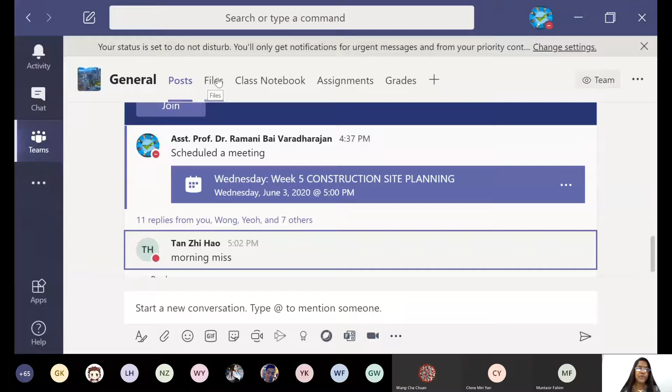Okay, can you see all the threads, and there are some assignment grades? Can you see that? Yes. Under that, you can see files, isn't it? See here, files. Click these files under your team, construction technology class team, files, class material. Under this I posted all the class materials. Last time I also posted the amended course outline because we changed the marking, right? I posted the amended course outline and all the classes. Every week's classes I posted here until last week.

All right, you have to follow the weekly slides, and please have a read through first of all. Right, any question from the last class? Any question? No question.

Okay, let's start the class. Start recording. Teacher, I can find the slides in the file section. Today's slide, for the slides you have uploaded in the files section, how can I find it? I didn't get it. Okay, just email me, I will attach it to you. I have it, okay, thank you. Just now I showed you, right? Yeah I saw it now, but when I tried to get it I couldn't. Okay.

Maybe you joined lately, that's why you didn't get the slides. Can you all see the PowerPoint slides today? Week 5, Wednesday class, this one.

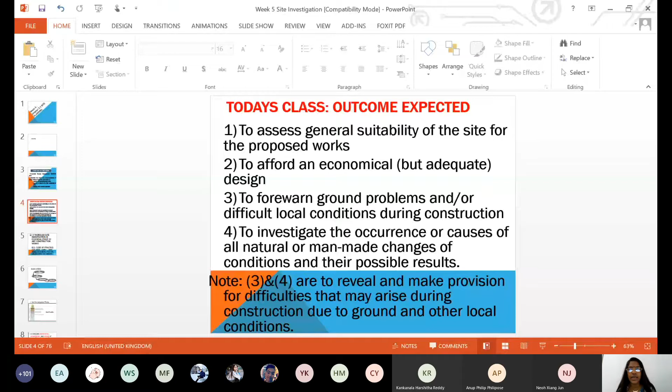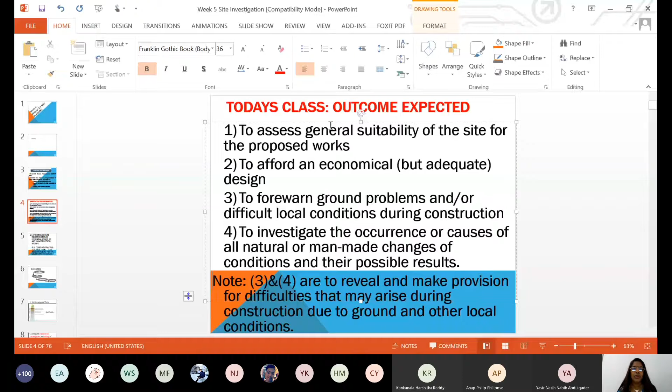When you go to the site, you are given a barren land. Your planning starts. Site planning starts, right? When I say site planning, what comes to your mind? What are you supposed to do when it is site planning? The foundation. Very good. So you must look for the foundation, because the construction work is going to start with the foundation. In the planning, you should include all information about the foundation: what is the type of foundation, what is the depth, etc.

Okay, any other answer? We will correct later. I'm going to give you the information anyway, and based on that we can correct. I just want to know how much you know before I give you the class. Any other information? Cut and fill, excavation. He's saying excavation. Excavation is coming to his mind when I talk about site planning. Yeah, you are moving slowly into the topic. Any other?

Okay. So once you learn this topic, what are the outcomes? We are at CLO2, the course learning outcome which has building elements. Under CLO2, you'll be learning about all the building elements, and one of the elements is the site. First, to assess general suitability of the site for the proposed work. You must check the feasibility of the site. Proposed work may be a residential building, school building, medical center, water treatment plant, or a processing plant, anything.

Second one, to afford an economical but adequate design, right? Once you... Yes, please. What happened? Any question? Can you hear me?

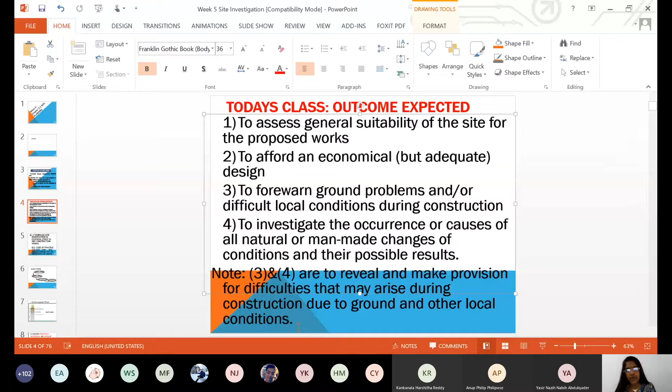Next. All these regulations and standards are available in BS. Globally we are following British standards. Later, European codes came out, and now we are using them together. Some companies purely use British code, some use Euro code, some mix. Some still use BS codes for concrete grades and the specification of the cubes and molds. Whether you are in Sudan, Saudi Arabia, Malaysia, China or India, we are still borrowing from British standards.

The number is CP 2001:1957, Site Investigation. You can search Google to read more. It puts its objectives as above; I borrowed all these objectives from the standard. Once you know site planning, you will know all the activities under it, especially knowing the characteristics and features of surface and subsurface conditions of the site given to you for construction.

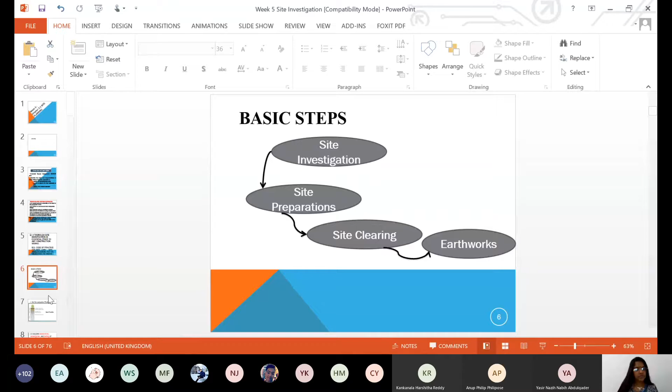Okay, come on, answer me. When you do the excavation, say for example, take the soil sample as it is. When you do the excavation, what's the purpose of doing excavation? Anybody? Hello, are you there? To do the foundation. Foundation, yes. Footings, maybe piles or shallow or raft, or just the brickwork or a concrete work, right? You need to put the foundation for your structure, right?

Oh, I'm just testing your common sense. Nowadays, because of more use of computer media, we lost using our common sense. Sometimes you must trigger that.

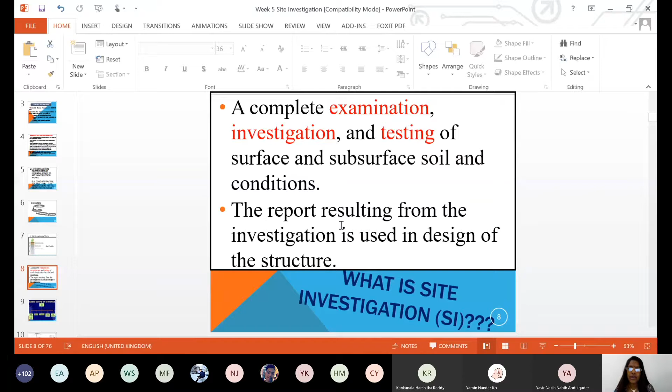Geotechnical. Very good. Maybe they are all year 4 students. Geotechnical or foundation engineer, soil engineer, soil scientist. Soil scientists can help to do this. So all the geotechnical information and geotechnical parameters have to be determined first. The job of geotechnical engineer comes in at the site, right? Before this, we saw what the civil engineer is doing at the office, what the design engineer is doing, what the safety officer is doing. When you come to site, the geotechnical engineer starts the job of soil testing.

Okay, basic scope of site investigation work. See here, there is a list of things that has to be covered under site investigation. Desk studies and site investigation, site visit. Okay, some groundwork, some forms, some rules and regulations, approval. Even for drilling, you need to get approval.

So approvals, all this desk work has to be done, and then visit the site, boring, start sampling. Once you sample, you can do the testing, and sometimes it may be sent to the lab or sometimes done in situ. Sometimes you need to wait, giving it to the department, getting the response, the results from the department. So these are the... What do you mean by boring?

Boring is drilling a hole. Oh, okay. For piling especially. Okay. Even for testing we use this. I will explain more later. So these are the things that will be coming under site investigation. I repeat, under site investigation, the tasks are desk studies, groundwork, or documentation work, and site visit, boring, sampling, field testing, and lab testing.

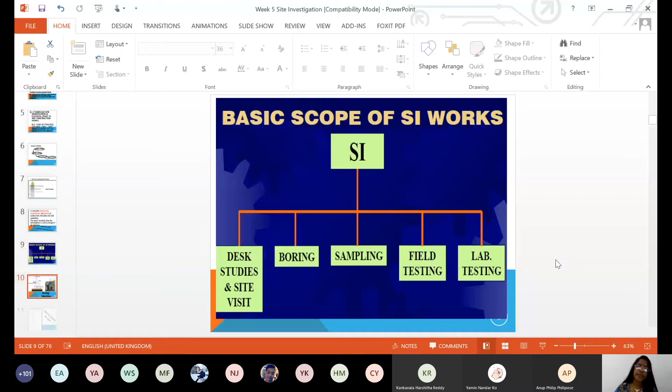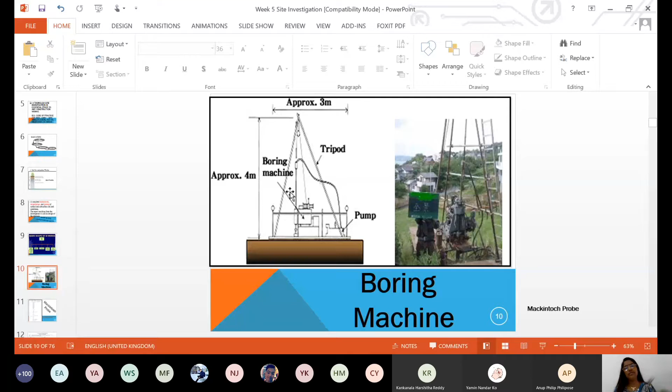Boring machine. You can see the picture here, boring machine. It has a tripod, the stand. Most of you have covered surveying, right? Surveying already done, right? No. Yes. Maybe around 30% of students have completed the surveying module. In that, you stand the equipment on a tripod, isn't it? What is the purpose of the tripod? Here, tripod. What's the purpose?

For maintaining level. I mean, making it stand exactly. Support, right? Support and maintain level. Support the equipment, firm the equipment to the ground. Otherwise, it will be shaking. If it is shaking, you cannot make the measurement, right? So for supporting the equipment and maintaining the level, as you said. Good. Then see here the equipment, the bore. Boring machine is here. It will drill the hole. It may be for sampling. It may be for piling.

Okay, next equipment. This one is for big projects, for piling, for foundation purpose. Second one, this one. This is most important. You should all know it for testing purpose, for examining the soil, investigation of the soil. Mackintosh Probe. This one you will be using in your laboratory. Has anyone used the Mackintosh Probe before, in your project, capstone? Yes. Mackintosh Probe in the geotechnical engineering lab, soil lab. A few year 4 students might have used it in their laboratory class under a geotechnical or soil related paper.

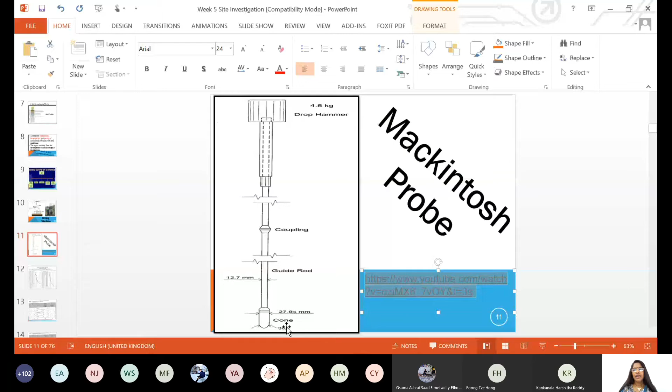So what do you see from the video? How to use this Mackintosh Probe, right? The purpose of this Mackintosh Probe is to test the soil beneath the ground. It's simply called a penetrometer, or penetration. The test is called penetration test to know about the soils that are below. You can also take a soil sample from this to test for other geotechnical properties like soil density, soil moisture, bearing strength, bearing capacity, and so on. Even the classification of soil also you can take, but depending on the amount of sample you're collecting. So many purposes are served by this Mackintosh Probe. Every company, builders should have one, even the universities, they should have a proper Mackintosh Probe.

Nowadays they are dynamic. You don't need to blow. They are automatic, motor-driven blowings are there. Dynamic Mackintosh are there, you can use it. Depending on the company, they will have manual or this type of Mackintosh Probe. You should know how to use it and what are the advantages of using it.

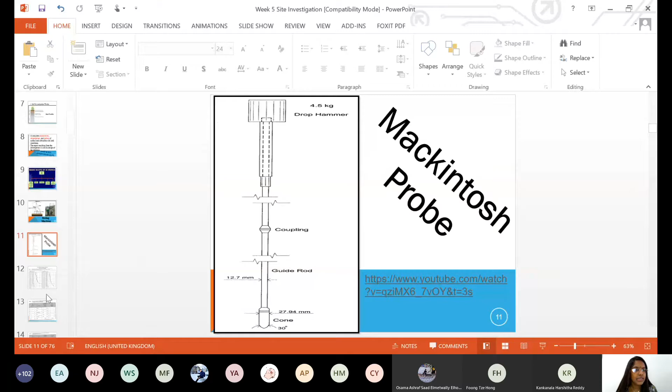Mainly to know geotechnical properties for sampling, for understanding the characteristics of the soil beneath the ground, and also for geotechnical properties. You see here the record. Just now they were talking in the video, so they take the video, I mean they have the observation like this. For every 40 blows, they reach until 0.3 meter. The rod has been driven until 0.3 meter. Another 32, they're driven up to 0.6. Another 12, they're driven up to 0.9. So it keeps on being driven into the ground to know how the soil strata is below.

According to the video, they said it can reach up to 400 blows or 15 meters, right? You have to reach the distance of... 15 meters, not here, huh? Not reached at all, but this is different data. So you have to reach a maximum of 15 meters or 400 blows, right? If you reach 400 blows in a shorter interval, shorter depth, then the soil strata is very good. You reach a hard strata very quickly, or within a short depth, meaning you are saving money for your foundation. You don't have to go deeper. Just there, for example, within 1 meter you reach hard rock.

Maybe you're building a house on a hill station. Then you reach within 1 meter very hard rock, then you can save, and you can have not only this type — we do not know the type of soil below, right? It's not necessarily a hilly station or hilly area. Even any terrain which has a hard strata will be found by using this type of penetrometer. At what depth you can reach the hard surface, so that you can stop your foundation there. You can decide your depth of foundation, you can decide your economy, your money spent for your foundation.

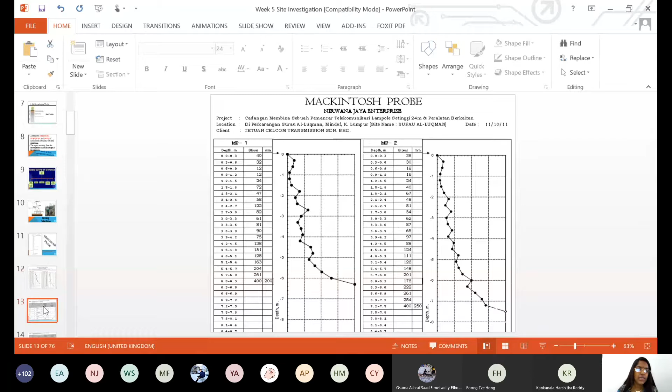You can check, right? Not only the foundation, also properties of the soil. Properties of the soil are important. Not only the properties of soil, but contamination — you will know the character, the properties of the soil, whether it's a contaminated soil, the quality of the soil. I mean to say, quality of the soil also you can determine by using these samplers. See, you will know more in a geotechnical paper if you conduct the test using this, or you go for a capstone project, you really have to conduct this to design your building. That time you'll know, you will have a chance to use it.

Hello? It's a blow, right? Sorry, over 30 blows. Sorry, 10 meters. Okay, it's a blow per feet. It's a blow only, no meter.

You can take disturbed soil or undisturbed soil. There are different types of tests you need to conduct to know the strength, compressive strength, flexural strength, for variable purposes. Maybe for the design engineer, you will be feeding the data, or for the environmental engineer, and so on.

You can use this for sampling, for comparison, and JKR Malaysia record - JKR, Jabatan Kerja Raya - or Mackintosh Probe. JKR has actually designed their own customized Mackintosh Probe for their testing, which is a better one. I have posted another video showing JKR's Mackintosh Probe, which you can watch later. It will be interesting for you. Let's look at this next property, and some of the other properties you can see here.

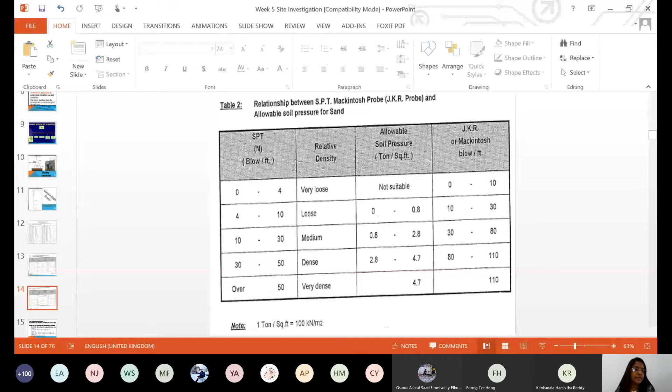Soil investigation continued. So we are still on the first topic, soil investigation. Maybe this topic has 4 subheadings: number 1 is soil investigation, then site clearance, and then foundation design, and so on. Okay, I will go through them one by one. We are still on the first topic, soil investigation.

Subsoil investigation shall be carried out very early, right? By this test, using Mackintosh Probe, you can know what is the strata below the ground, what is the nature of the ground given, and decide what type of structure it could be - whether you can go for a high-rise building, a bungalow, or just a terrace house, and so on.

This stage is for the purpose of designing a building, and it's planned in 3 phases. This site investigation can be in 3 phases: phase 1, phase 2, phase 3 - collection of available information, preliminary reconnaissance or site visit (we can call this a preliminary site visit), and detailed soil exploration. So under site planning or site investigation, you will be doing these 3 tasks.

Collection of information means the soil information, soil sampling. Site visit: you must see whether the site is occupied by somebody, what is the land use before you occupy the ground. Is it forestry? Is it agricultural land? Is it barren land? Is it used for disposal, and so on? Detailed soil exploration will cover the porosity of the soil, soil moisture content, soil classification, and the properties of soil, and so on.

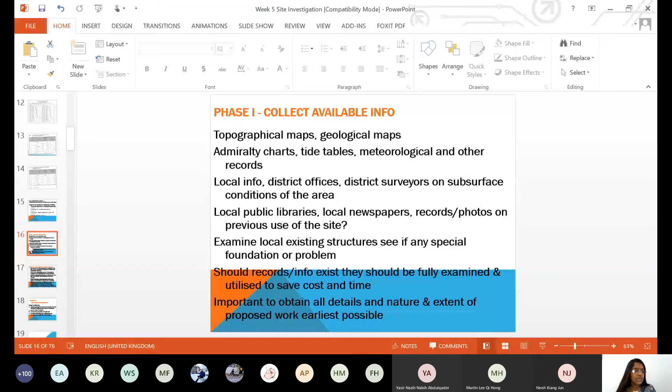Okay, Phase 3, detailed exploration. The scope is to determine the scope of site exploration further, for detailed geological structure of the site, thickness, sequence, and extent of strata. The earlier phase, Phase 1, was mostly maps related and background or previous information, all paperwork. This phase goes into the site, which is soil strata.

The second one is topography survey if necessary, reconnaissance survey - these are all about the photographs and the maps.

Phase 3 is for the real structure, real soils, structure at the site, underground site. For this you need to know the thickness, sequence, extent of the strata - strata means layer - groundwater conditions, mechanical properties of the in-situ soil, mainly the bearing capacity of the soil, strength of the soil, whether it's loose soil, hard strata, full hard strata, half clay and half rock, or sandy, silty, to obtain disturbed and undisturbed soil samples for identification and lab testing.

As I said before, for some purposes you may be using disturbed soil. What is disturbed soil? What is undisturbed soil? There are molds and equipment available for taking samples like this.

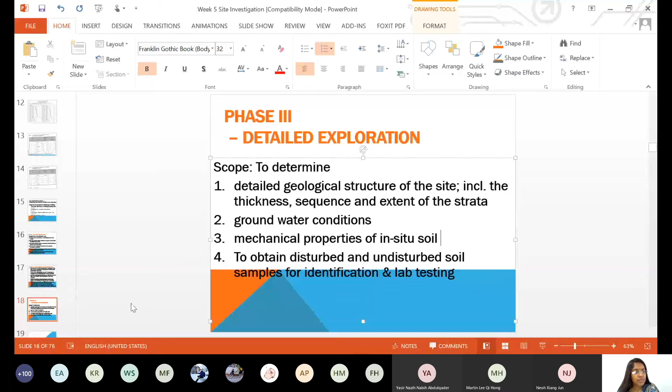In some situations you need to use disturbed soil - for knowing the strength of the soil, you really have to compact it properly, preparing the soil sample before testing. In that case you can take disturbed soil. But for undisturbed soil, if you want to know the strata, the soil layer of the ground, you have to take undisturbed soil, so that you know the layers at different depths. Depending on the purpose, you will go for different types of sampling.

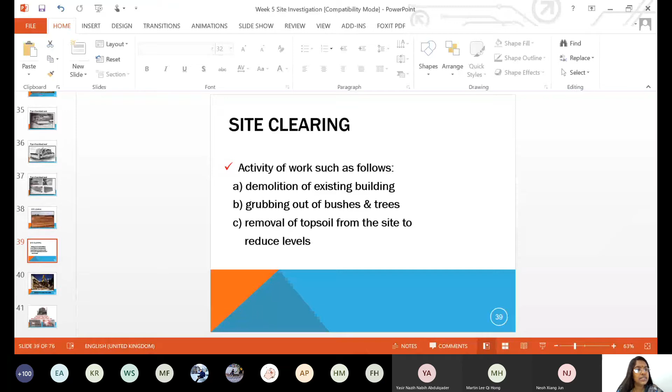Okay, where are we here - site clearance, site preparation. So far we did site planning, right? The preliminary things, paperwork, test work, and documentation work has to be done.

Second is site preparation. How are you going to prepare the site? The site is given, preliminary tests are done, investigations are done. We are going into the site to clear it. Before clearing, you prepare the site and put proper fencing. Let's see what the things are.

Site preparation. What is site preparation? It is all activities that have been done before actual construction work is carried out.

I'll rewrite the sentence later. But here, site preparation means you should know who were the dwellers before, whether it was a forest or a water body. Sometimes they close the water body to construct their building. Sometimes it may be a cave, sometimes a hill or mine. So you need to know the type of usage before.

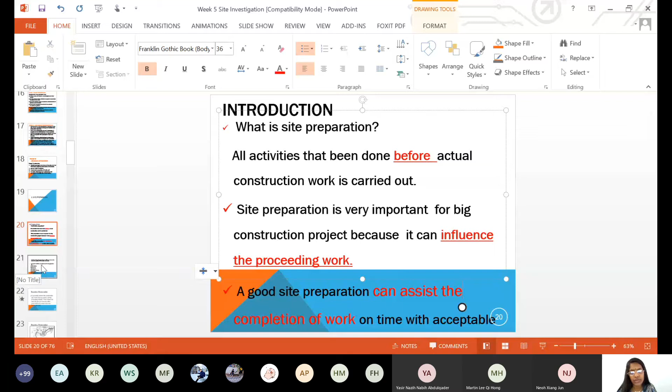You should avoid all these things. Prepare the site before you start the work. A good site preparation can assist the completion of the work on time with acceptable quality, because you don't spend time at each and every stage to clear or prepare the site. Prepare the site first, so that further work will be very smooth and on time.

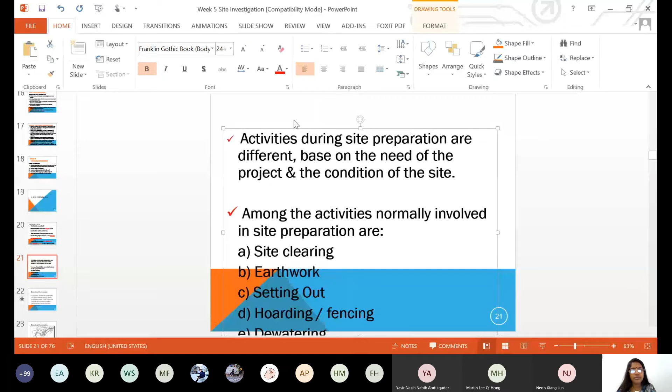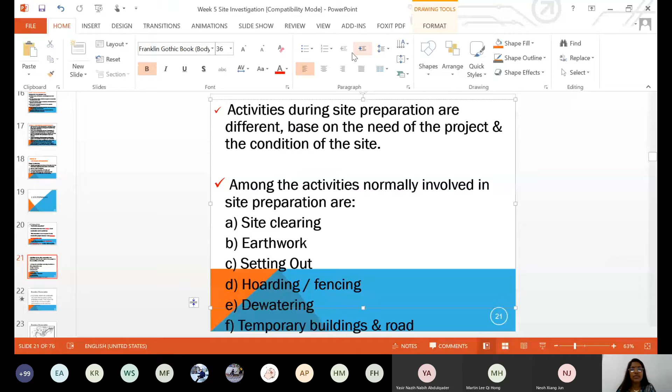Activities. Let me make the slide bigger. What are the activities you can do for the preparation? During site preparation, these are different based on the need of the project and the conditions of the site. So based on the need, you can prepare the site. Among the activities normally involved are site clearing, earthworks, setting out, hoarding or fencing, dewatering, and temporary buildings and roads. That's all, these are the main things, just as I was saying.

For preparing your site, you may be clearing, doing some earthwork, leveling it, or setting out the curves and the undulations. The setting out of curves itself is one of the survey problems you'll be doing in your survey module. You should know this.

Mainly for transportation, planning your roadway and your in-and-out communication through vehicles, especially for loading and unloading materials during construction. In future, for the dwellers, you should provide proper alignment of the road, and for that, the setting out of curves will be useful in future. So this job is done during preparation of the work.

Fencing and dewatering: fencing means providing the proper netting arrangement to mark the border of the site. Dewatering means if there is any water, a pond or a spring or any small water body available, you need to fill it up or dewater it. Temporary buildings and roads may include small building blocks. If it is a government building, like housing for electrical works or a water tank, you cannot remove it, you have to avoid it. But other buildings, like cemeteries, dumped materials, or demolished parts of houses, have to be removed before you start the work.

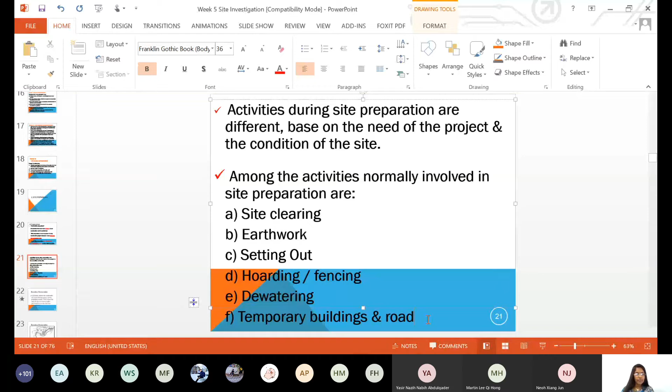Boundary demarcation: now we are starting the border line. You can use lime powder, or proper sketching equipment, to mark the site. There are nice videos if you watch about this boundary demarcation, showing how it's done to start the excavation. After preparing your site, you should do demarcation.

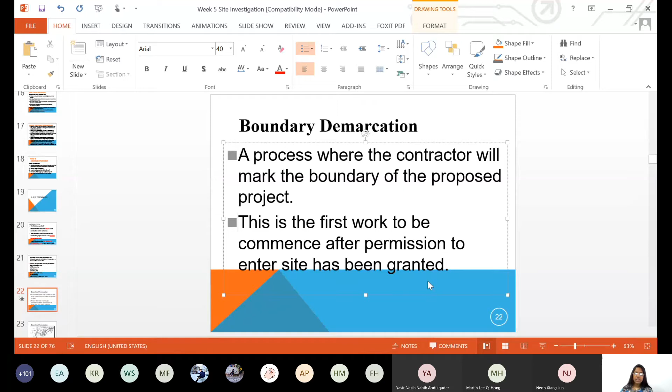Where the contractor will mark the boundary of the proposed project. This is the first work to be done after permission to enter the site has been granted. So boundary demarcation is important so that everyone is well informed, to avoid any activities like using the place or space for storing materials, wasting materials, or misusing others' boundary. Boundary demarcation is something like this, where I put a big one.

You can follow the exact layout which was prepared before and mark the boundary by constructing a fencing or by proper painting arrangement.

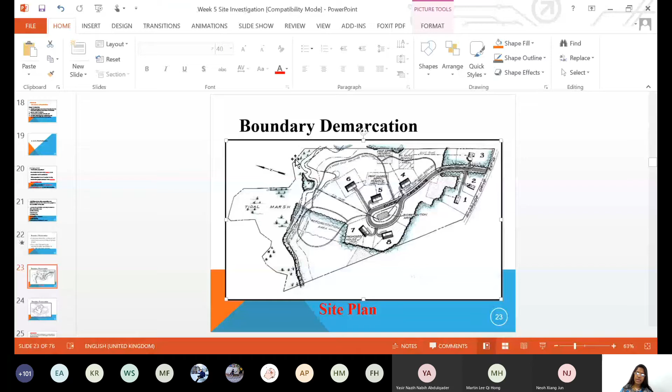Painting, or proper marking, to divide or provide the proper layout for your building. Then boundary demarcation - for example, you can see here the thickened line on the map.

Look, it is not just paperwork. It has to be available - the same thing should be available at the site. The aerial map or aerial photograph should look like this after demarcation.

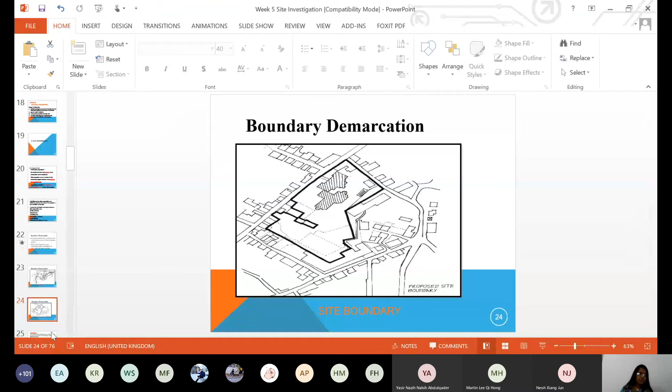Next one, site boundary. The surveyor must determine the site boundary.

Of the construction area, to avoid trespasses to the other construction area. So the purpose of the boundaries - everybody, both the workers at the site and also the people passing by, should know.

This is meant for construction. You should not enter - there is a hazard inside.

In many places, they provide proper boundary fencing or tapes. They put a tape, or even panels, steel panels.

Some sheets are marked and fixed at the boundary to divide the construction area from the common public areas.

Okay, site clearing. The third one is site clearing.

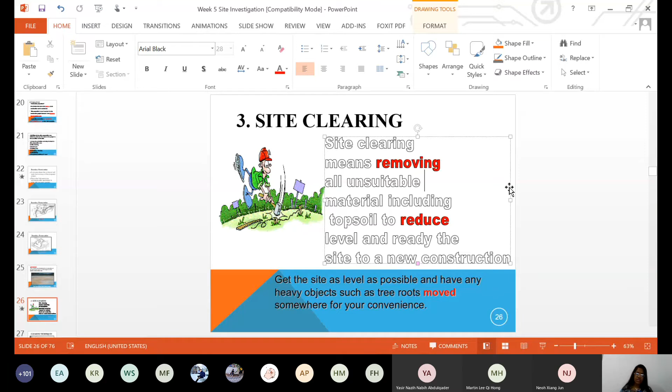Unless you are going to design or construct a drainage system, if you start with the building work, you should level it. Normally, if you level it, the build will be very easy. Sometimes they follow the curvature - that is risky, or more expensive.

If money is not a matter but time is a matter, you can avoid the time duration for clearing or leveling the site and go for construction following the curvature of the site given.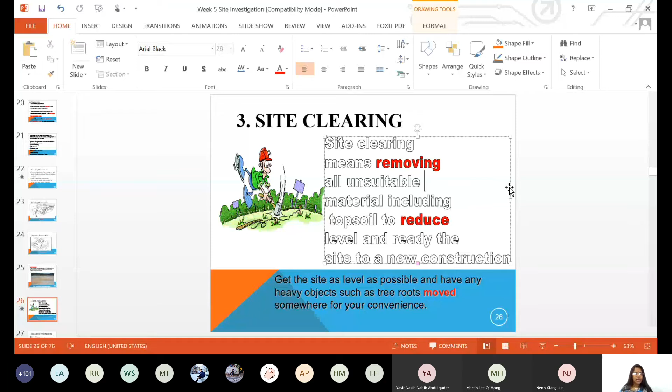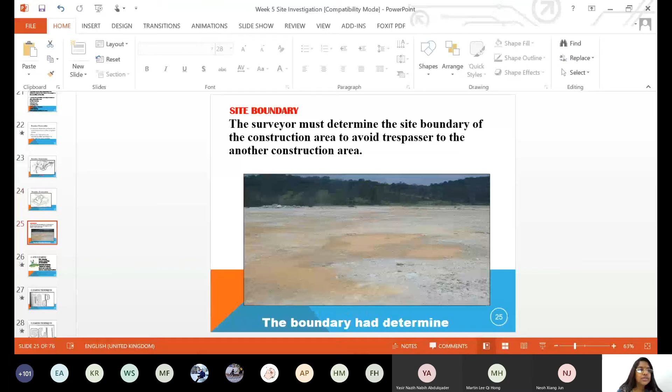Okay, before I go into the theory, let me show this one. When you talk about site, what are we doing? The title is site clearance. One moment - for site clearance, I will show a video.

What is this equipment called? I already wrote it there - for site clearance, you can also use backhoe excavators. This excavator is used for excavation, also leveling, also removing unwanted materials from the site.

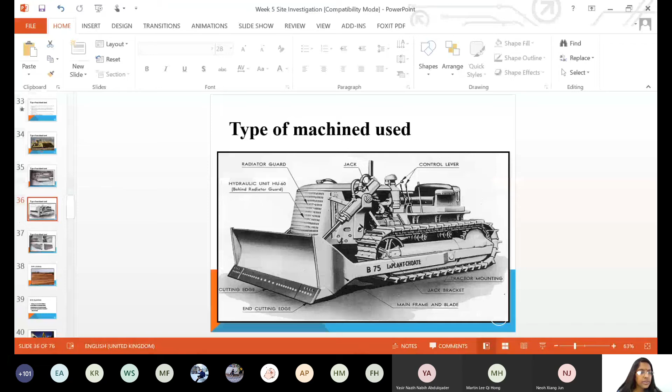Let's see one interesting video on this, how these excavators are working. There are different things here, but to avoid too much talking, I'll introduce this video here.

Where is it? Let's put it somewhere here. See - let's watch this video for a while. Is it?

All our theory you can just go through and read, but this video will be helpful to match your theory.

One moment, I share the slide. One moment, are you there? Are you all there? Yes, yes, okay thank you. No, not this one, wrongly shared. Wait, one minute, one minute. Where's this, stop sharing. Share my video, where's it?

I can't open the video. It's here, okay. Please watch this video - very interesting one to know.

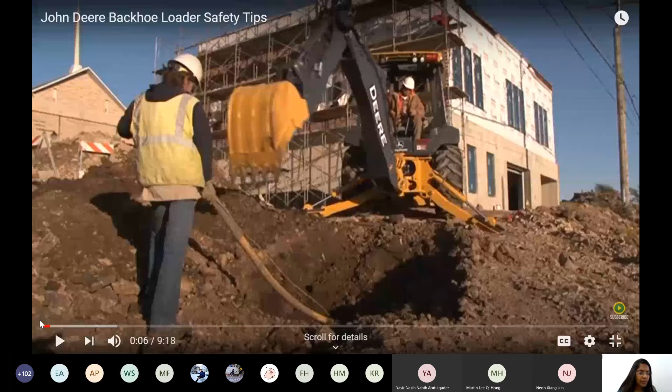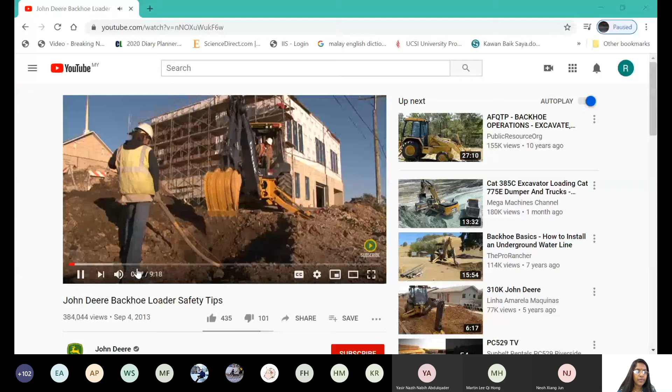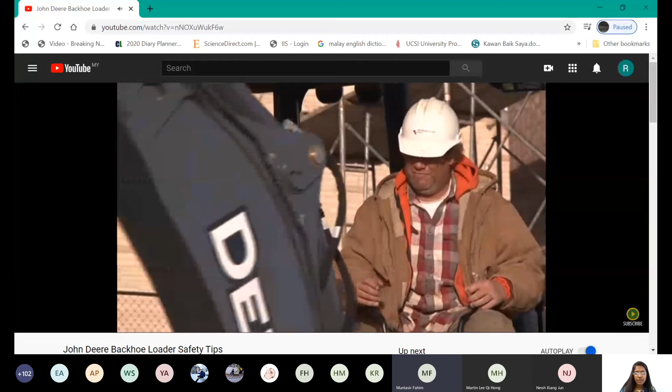Can you hear? Can you all hear? No, no, the video - we can't hear that. We can hear you. Wait, I'll change the video, there's a louder one actually.

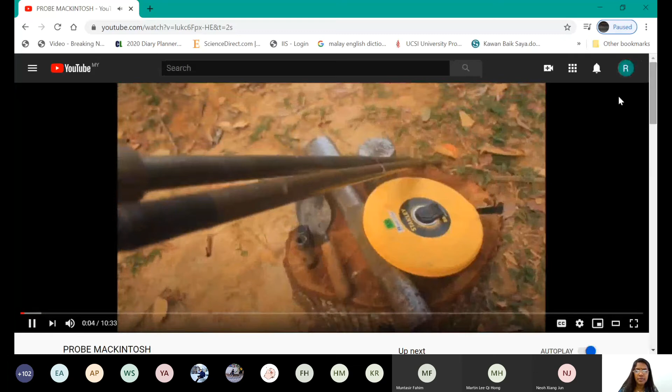No, not this one. Where, unavailable? I played it before - no, unavailable. Can you see the video? Can you see the video? No. Yes.

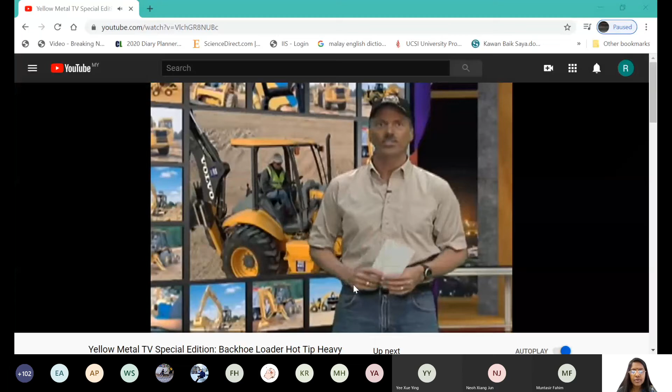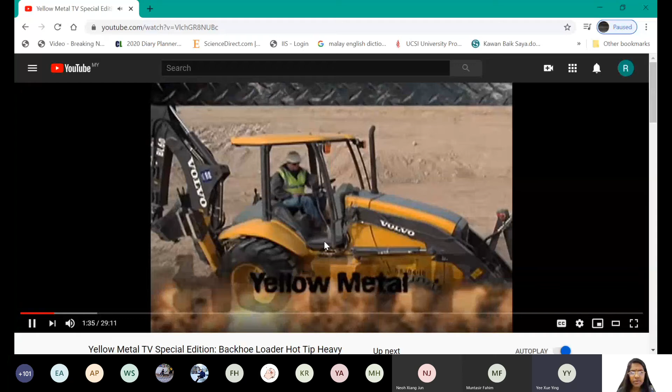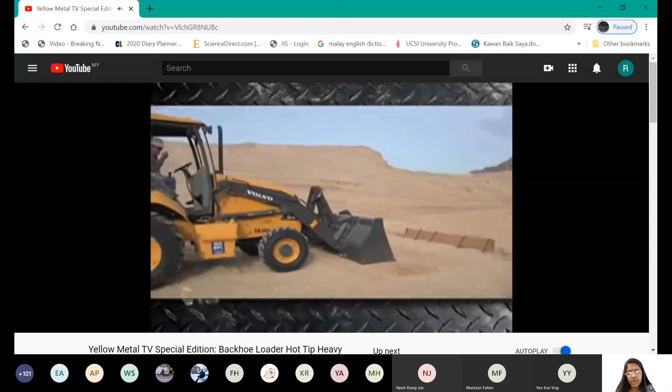I can hear. Now, you can hear? No, no. But can you see the video, right? I think these sounds are not supported in Teams. No, I'll check this later - maybe I'll call from Teams.

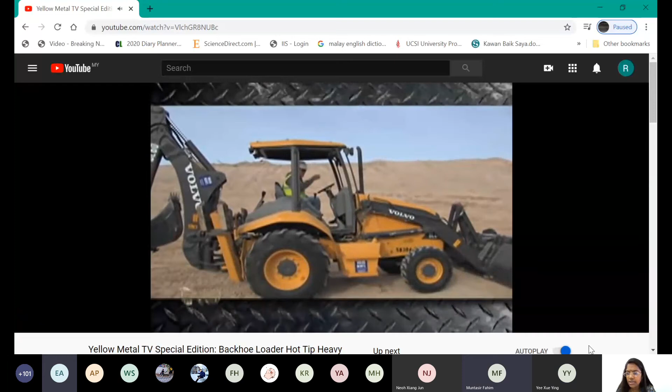Can you hear me? Yes, miss, we can, yes. I changed the mic, I changed the speaker to something.

Okay, please listen to this, I will explain the operation. It is showing - you are seeing a backhoe. How the backhoe is working. Backhoe excavator is...

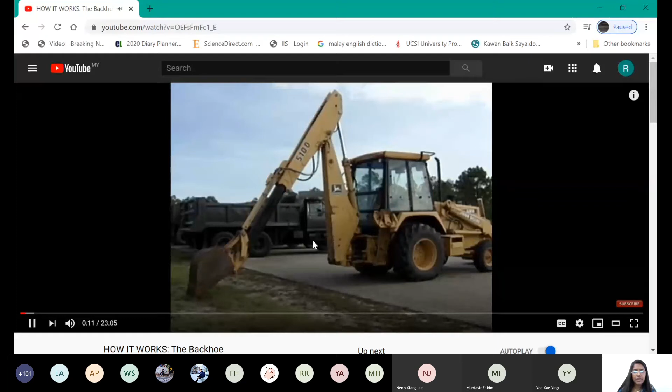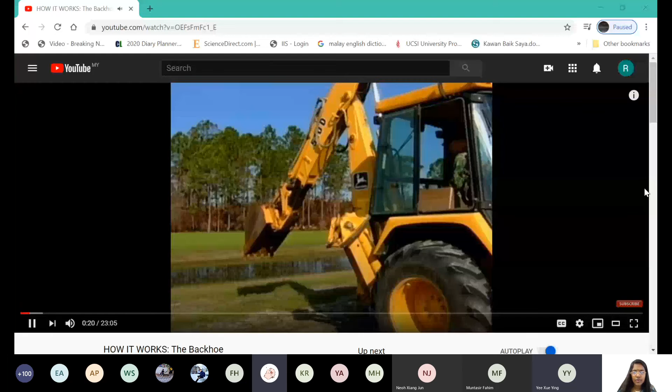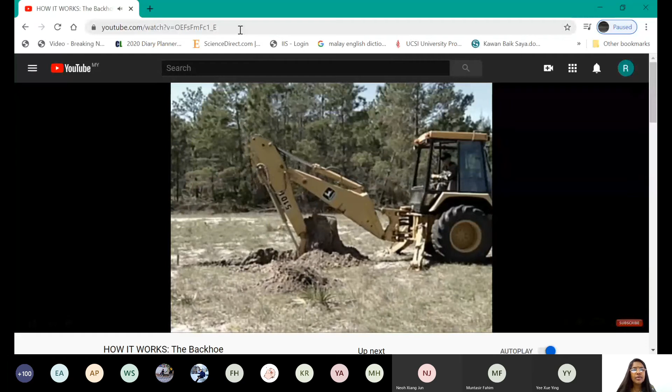Can you hear this one? Can you hear now? No. Sorry, no, cannot, okay. Need to check, okay, I need to change the format of this.

Video enable - okay, it doesn't matter. Let me continue with the class because we're left with only a few more minutes. I will check this issue. But yesterday, last time, the video had a problem too.

Last time I showed one video, right, in the beginning - the one I showed. Yeah, it was also without audio. Audio, sound also. Oh, why didn't you tell me? Okay, I will check this and I will also check with the participants.

Okay, sorry about that - the construction site one had no sound. Oh, I'm so sorry, okay I will check. Thanks for the information, I will check first, and next time I will give you the audio. For now, let me continue with the class.

But it's interesting to see real work rather than just talking. Okay, all these things and the marking, clearing, you can go through. Where is it, here - so like this type of... oh, I need to share the slide.

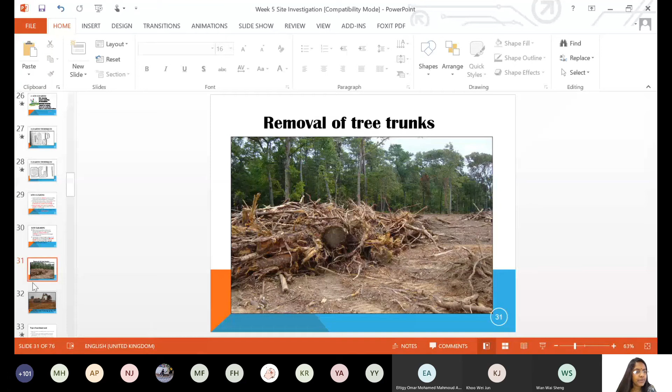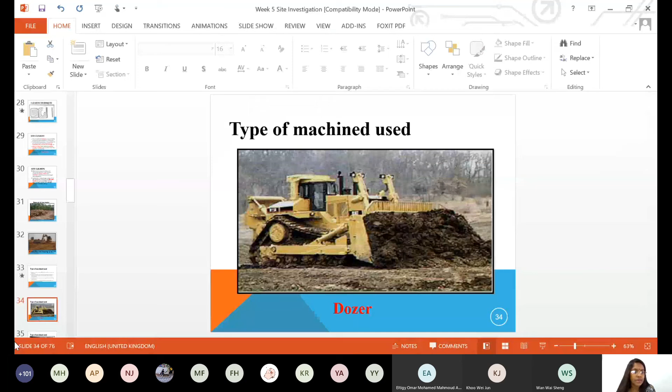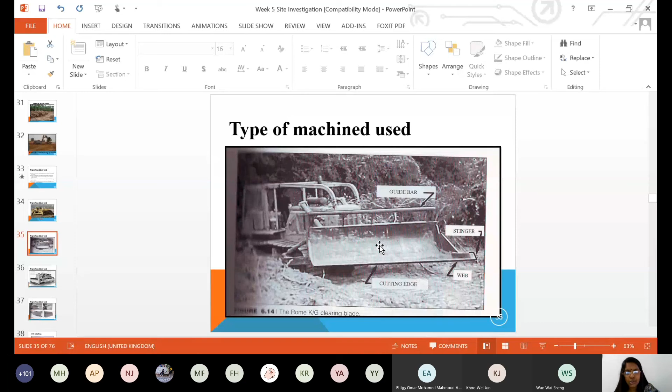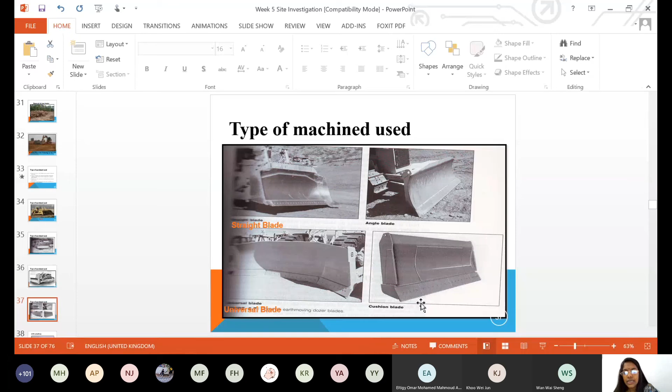This is another one. See here, guide bar, web or bucket we can say, and then cutting edge. Sometimes it's a cutting edge, or it may be used at the back and only used for collection. And this one, straight blade, the types of blades for cutting ground. Straight blades, angle blades at a 30-degree angle for cutting soil, universal blades, cushion blades, there are different types.

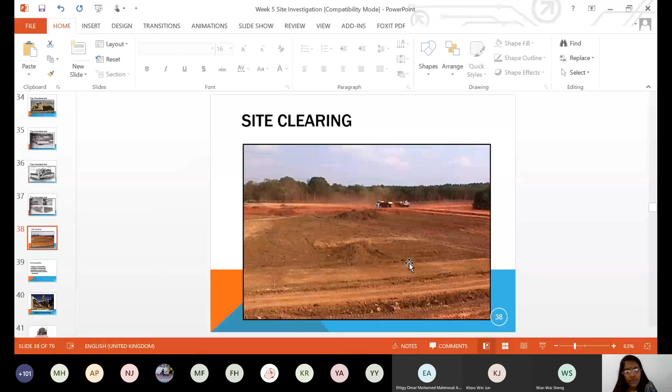Okay, see here the hood is used for site clearing or site leveling. Demolition of buildings also. There are nice videos I put in. Sorry, the audio is not working. Otherwise you would know how to operate, what are the conditions, what switches you need to operate to move the hoe front and back, both buckets, and also the hood.

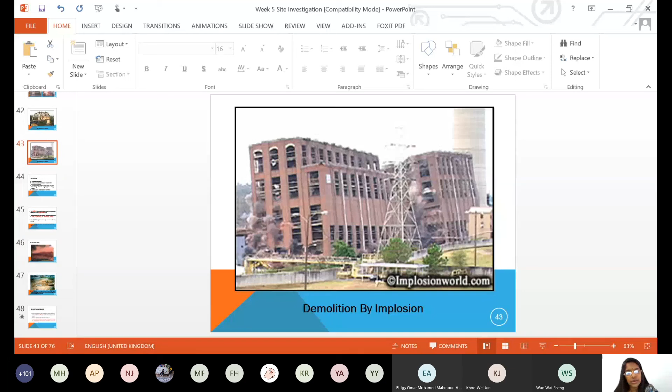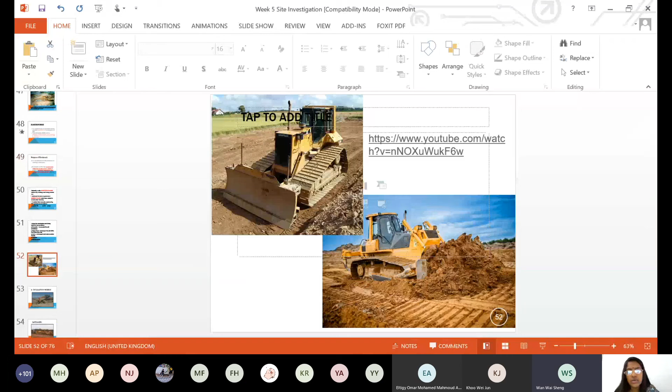Okay, what else? This I will talk about later, demolition and construction. Surplus soil. Okay, any questions so far? Any question? Miss, after the site clearing, where does the soil or the waste go?

Number one, they try to use it back for filling the flooring. You need to fill the flooring, right?

Can you put this the same thing? Sorry. Can you hear the audio now? Okay. Hi. Hello. Are you there? Yes.

Yes. So your question is where the excavated material will go, right? Number one, they will dump it at the site, and it will be used for filling purposes later on, mainly for filling the flooring. When you construct the building blocks or rooms, they are covered by walls. Inside has to be filled up until the floor level. So these soils are reused for filling the flooring.